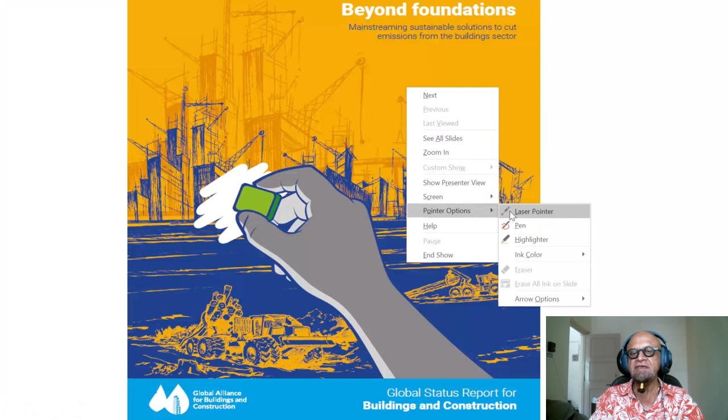Buildings and construction are among the major sectors as far as contributing to total emissions are concerned. So here are a few ideas. This is from the Global Status Report for Buildings and Construction, the Global Alliance for Buildings and Construction. Beyond foundations, mainstreaming sustainable solutions to cut emissions from the buildings sector.

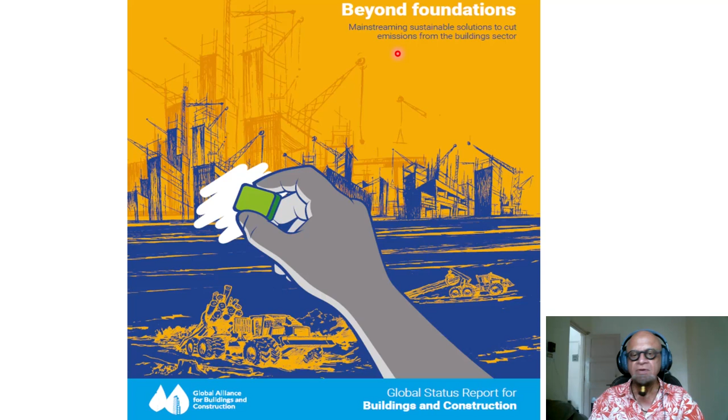Obviously a good idea, and you have to take the ideas from wherever they come from. Just because they are profit-making companies doesn't mean they cannot put out good ideas on what they want to do to make themselves more sustainable, because everybody now has a motivation to at least appear to be environmentally friendly and sustainable. And of course there are green certification programs and so on.

The executive summary is that the buildings and construction sector contributes significantly to global climate change, accounting for about 21% of global greenhouse gas emissions. In 2022, buildings were responsible for 34% of global energy demand and 37% of energy and process-related carbon dioxide emissions. This is only expected to keep growing by 2050, as we'll see in a minute.

So policy progress is evident with more comprehensive climate action plans covering buildings and construction in nationally determined contributions. If you don't know what they are, you can follow up elsewhere. Countries that signed on to the Paris Agreement committed to contributing to global mitigation through these nationally determined contributions. However, few align with net zero operational emissions, and while over 81 countries have building energy codes, many are outdated.

Investment in building decarbonization is growing, and the necessary investment increases are actually falling short of the net zero targets for new and existing buildings by 2030 and 2050 respectively. So if you want to hit the 2 degrees C warming target, then you have to hit net zero, let's say by 2050. The building sector has to do its part, so it has to be in a position to reach its full contribution in terms of a trajectory. We should be able to see that by 2030 and so on and so forth.

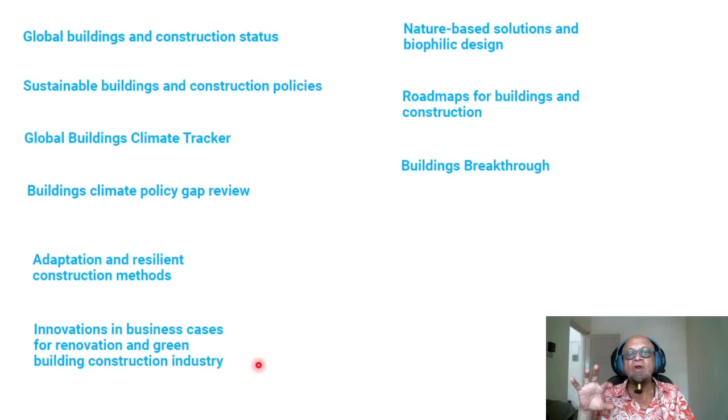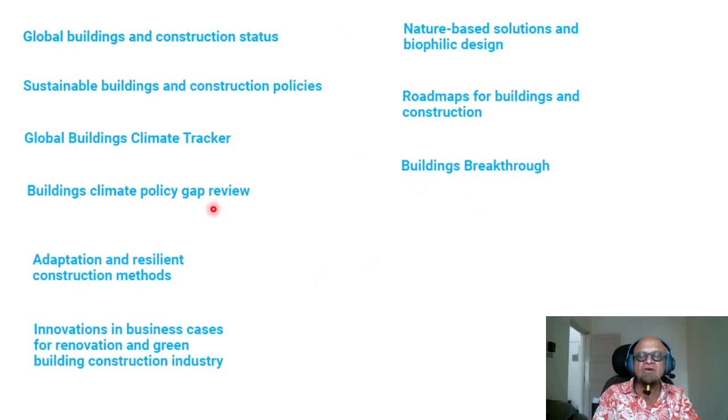Okay, so the topics covered are global buildings and construction status, sustainable buildings and construction policies, the global buildings climate tracker GBCT that we just mentioned, buildings climate policy gap review, adaptation and resilient construction methods, innovations in business cases for renovation and the green building construction industry. Obviously, old buildings have to be retrofitted to make them more environmentally friendly, reduce their emissions, take them towards sustainability and so on. Nature-based solutions and biophilic designs are also in play, roadmaps for buildings and construction, and buildings breakthrough. I'm reading off the subsection titles because it's a long report. I'm not going to read all of it, but I'll show some key highlights.

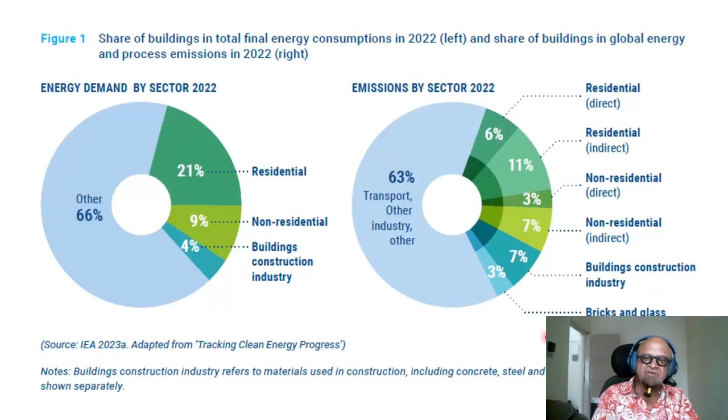So these are the share of buildings in total final energy consumption in 2022 and share of buildings in global energy consumption and process emissions as well. So energy demand by sector: 66% comes from other, 21% from residential, 9% from non-residential, 4% from the buildings construction industry. And in terms of emissions by sector, the transport and other industry, that's 63%. Then you have residential, direct and indirect, non-residential, direct and indirect, buildings construction, and bricks and glass. So it gives you some idea of where the levers may be in terms of reducing emissions.

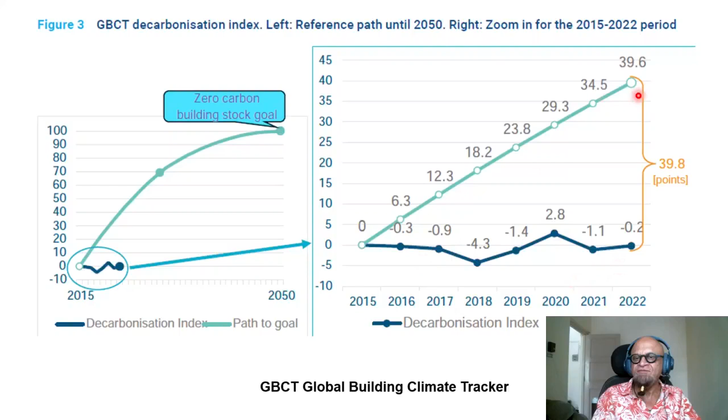The Global Buildings Climate Tracker Decarbonization Index looks at where we are and where we are headed. So on the decarbonization index, we are somewhere here, and it needs to head this way by 2050. The path to the goal is up here in terms of hitting 100% net zero for the building sector, and the gap here is 39.8 points. So they have an index that defines all these things. I'm not going to go into that, but you can see that there is a fairly substantial gap between where we are in the last few years and where we need to be if we want to hit the goals by 2030 and 2050.

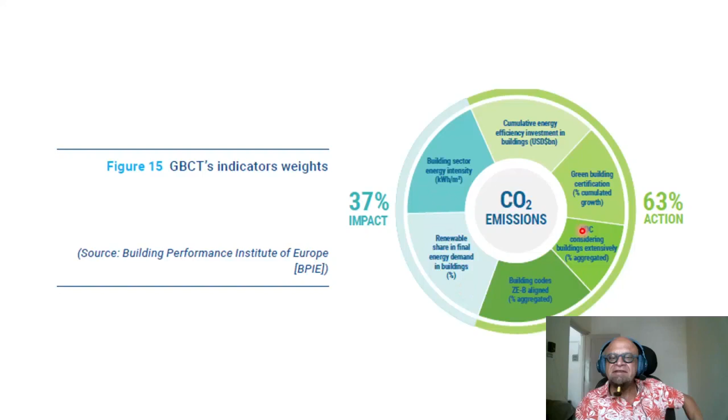You get the idea that GBCT is tracking net zero and where we are. So let's jump to recommendations for policy and decision makers. Again, not reading the whole thing, but the 2024 Global Status Report for Buildings and Construction indicates a significant lag in the sector's progress towards the Paris Agreement's net zero carbon targets by 2050. To address this, the report provides targeted recommendations. So that is split into for governments, private sector, researchers, and how these steps can help.

So for governments, the urgent need is to develop and enforce climate action roadmaps for buildings and construction, with 161 nations still pending. Private sector actors are encouraged to integrate climate action roadmaps, channel investments into energy efficient and net zero carbon buildings, and undertake retrofits to lower emissions, of course, right? How all these things will be incentivized is still tricky.

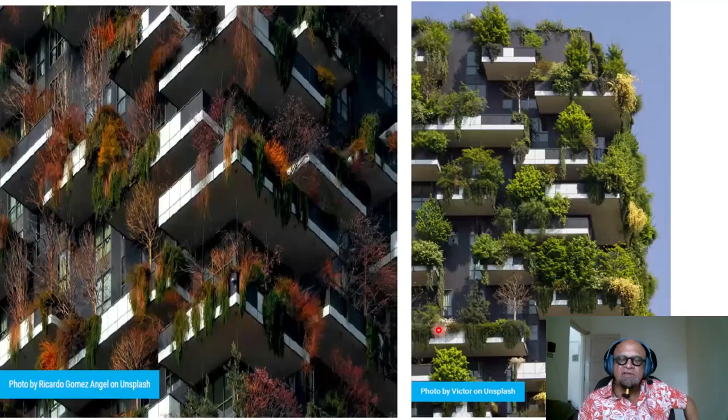Researchers and NGOs play a crucial role in supporting the creation of climate action roadmaps with evidence-based research. These steps are critical for realigning the buildings and construction sector with the global climate goals, ensuring a sustainable and resilient future. Okay, that's a good kind of a broad guideline for policies, but details will be region specific, local specific, climate specific as well.

So some nice images of the efforts at individual building levels on reducing energy use, improving air quality, and taking out CO2 with vegetation. So you can think of rooftop gardens, but also gardens literally on each balcony, and there is a lot of literature on how these are beneficial and so on. They also do social impact assessments in this report.

I'm not going to go into the details, but obviously we have Scope 0, Scope 1, Scope 2, and Scope 3 that we look at, entity and internal practices of the particular part of the sector. So here examples include ethical leadership, employee health, working conditions and satisfaction, stakeholder engagement, corporate governance, so overlapping with the ESG, or the environmental, social and governance reporting that is needed.

Building users and sites under scope 1 with housing attainability, habitability, indoor environmental. So this is social impact work, not emissions. Sorry about that. Climate change impacts and adaptation measures, and of course here you have community and surroundings, supply and value chains, and you have social impact issues and considerations across all scopes. Okay, so these also include diversity and inclusion, health, comfort and safety, privacy and security, and climate impacts.

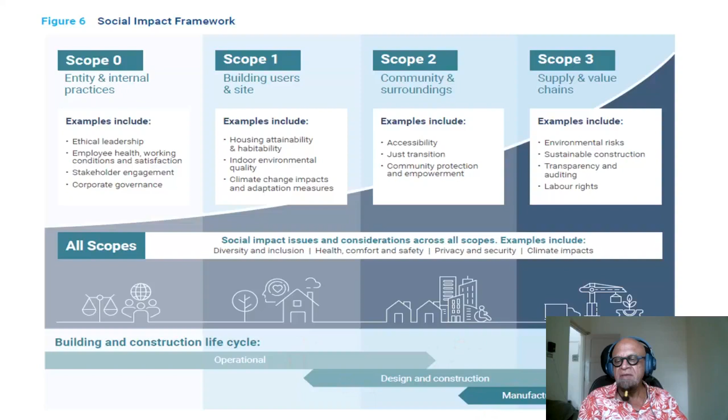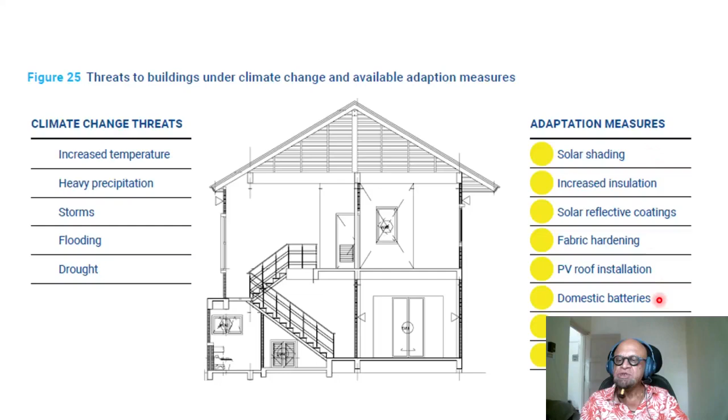Threats to buildings under climate change and available adaptation measures. Of course, you have chronic stressors like increasing temperatures and heavy precipitation, but you have acute stressors like storms, floodings and droughts. And adaptation measures, of course, include renewable energy and solar shading, increased insulation, solar reflective coating, fabric hardening, PV roof installation, domestic batteries, green facades, rain water tanks, and so on.

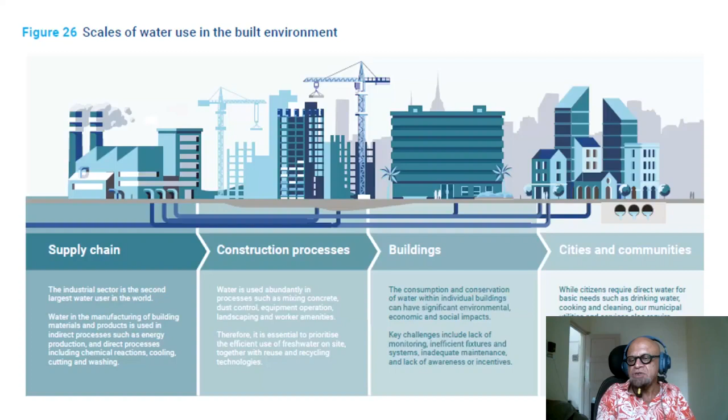Scales of water use in the built environment. You have the supply chain use, construction processes use a lot of water, buildings of course themselves will use, and in a setting, cities and communities. So while citizens require direct water for basic needs such as drinking water, cooking and cleaning, our municipal utilities and services also require fresh water. Urban centers often face problems related to insufficient infrastructure, water consumption and loss, wastewater management and water drainage. So water is an important consideration.

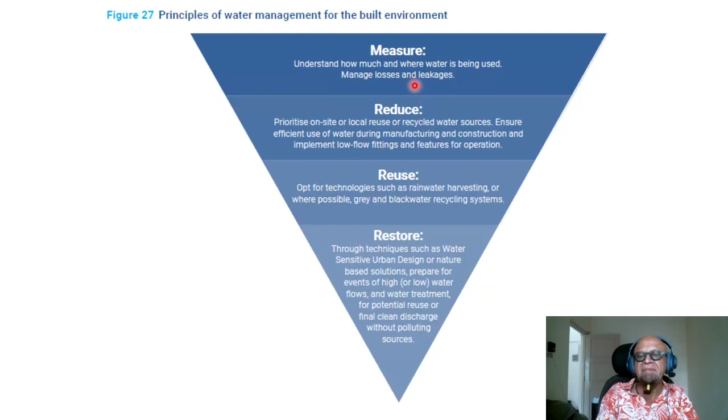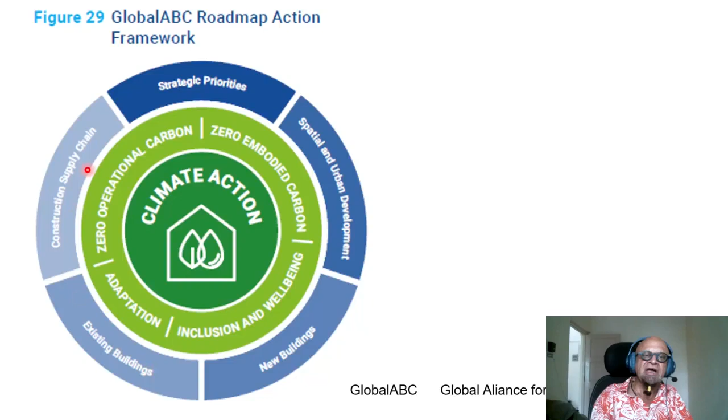So embodied carbon of course is that when you produce cement, steel, bricks, etc., and put it together, you have locked in some carbon that is emitted in manufacturing. So the outer layer has strategic priorities: spatial and urban development, new buildings, existing buildings, and construction supply chain. So these are the things you have to worry about in terms of making them compatible with climate action, global warming targets, net zero targets, and so on.

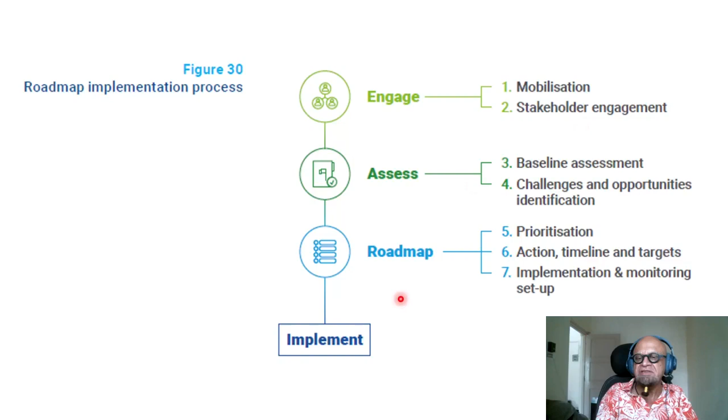There is a roadmap implementation process that is about engaging, assessing, and road mapping so that you can complete the implementation with mobilization, stakeholder engagement, baseline assessments, prioritizations, and timelines, targets, etc. Okay, so I ran through it rather quickly because it is just an addition to what we have discussed in terms of materials, wooden skyscrapers. I also have podcasts on reducing emissions from cement and steel industries and so on. So this is just a complement to that.

The building sector as a whole obviously is a big player in overall emissions, and it has to be mainstreamed for sustainability and reducing emissions, and these are the ways to do it. And the global tracker gives status updates that maybe I can report back in a year or two if there are significant updates. Okay, so I will leave this here.